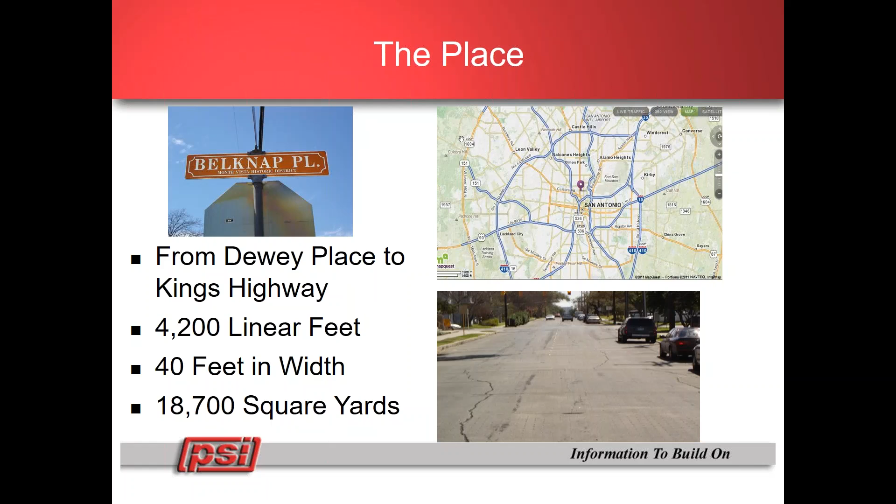Last year, in May, the homeowners of the historic Monte Vista district celebrated the dedication of Belknap Place as a Texas historic landmark. The place is from Dewey Place to Kings Highway in San Antonio, Texas. It's approximately 4,200 linear feet long, 40 feet wide, or approximately 18,700 square yards.

The person, Augustus Belknap, was born in 1841, Newburgh, New York, served as a captain of the New York Volunteers during the Civil War, moved to San Antonio in 1877, and was instrumental in the founding of the city streetcars, president of the Opera House, director of the San Antonio Fair Association, Second Ward Alderman, councilman at large, and founder of a local militia, the Belknap Rifles.

25 years after his passing, the City of San Antonio, the State of Texas, County of Bexar, on July 1st, 1914, awarded to Texas Granitoid Company the city's share of $14,900 through the sale of bonds on September 1st, 1913, to finance the construction and the paving of Belknap Place.

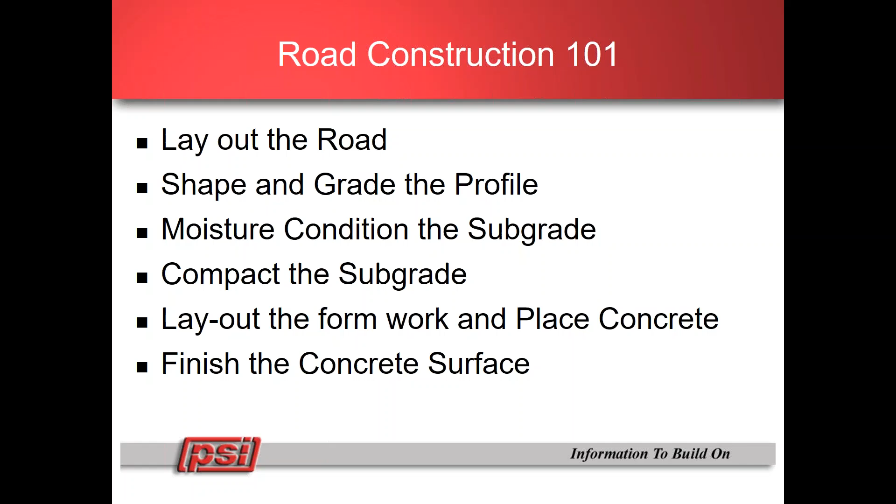I'm going to talk a little bit about Road Construction 101. As civil engineers, I'm sure we're all aware of the basic process: laying out the road, shaping, grading the profile of the subgrade, moisture conditioning the subgrade, compacting the subgrade, laying out the forms, placing the concrete, and finishing the concrete surface. Back in 1914, surveying was performed with optical transits. Perhaps distances might have been measured by the chaining method.

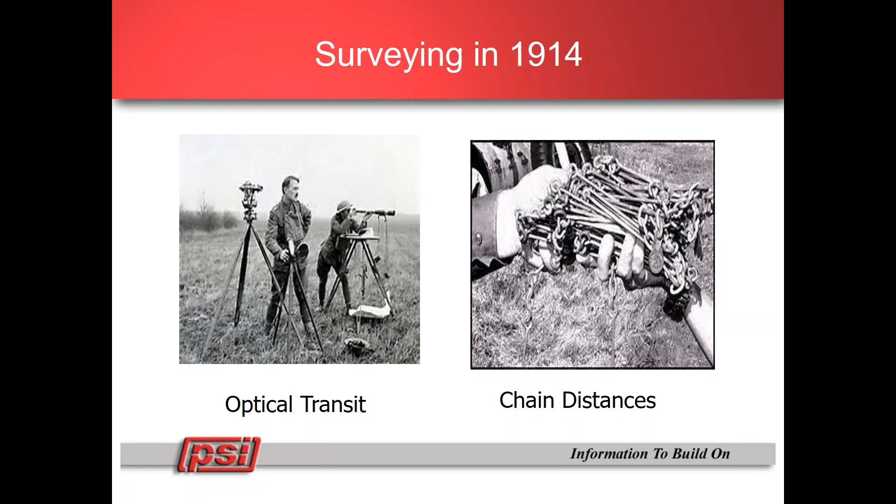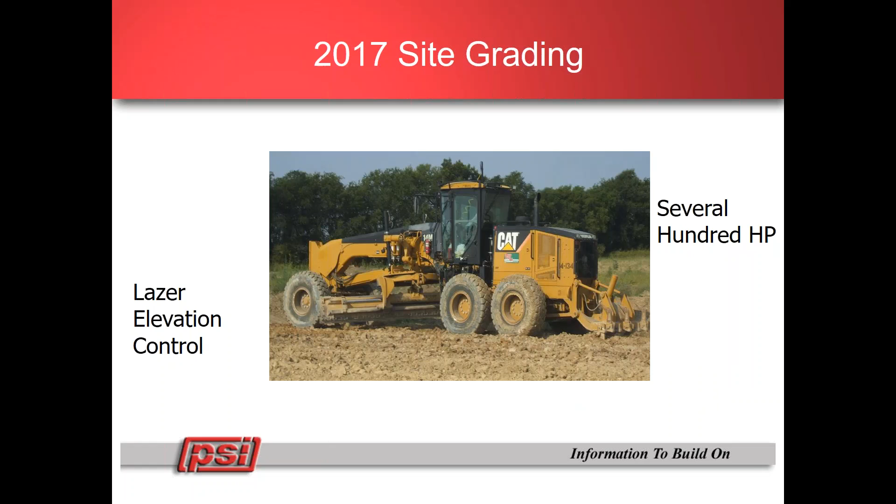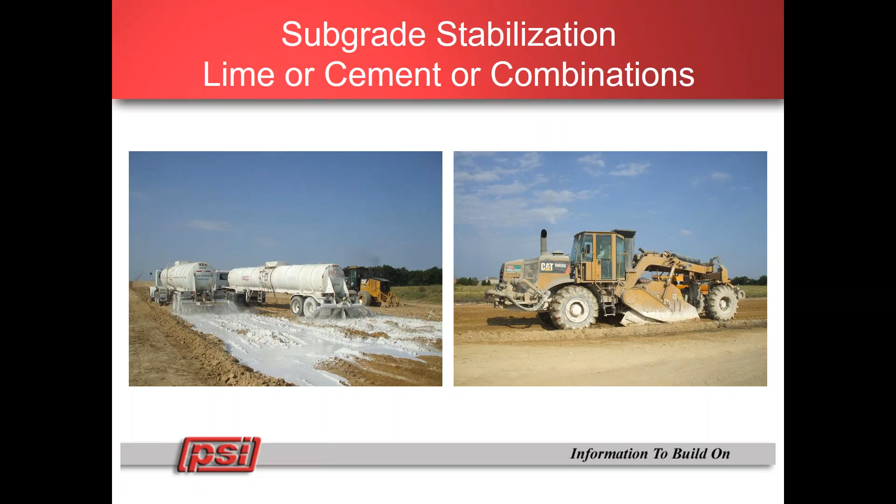We have subgrade stabilization with lime, cement, perhaps lime-cement-fly ash combinations, or other chemical admixtures to help in the stabilization of the subgrade. Back then, none of that was available. Today we have modern equipment for the pulverization and moisture conditioning of the subgrade for improved longevity and durability. None of that was available in the 1914 era.

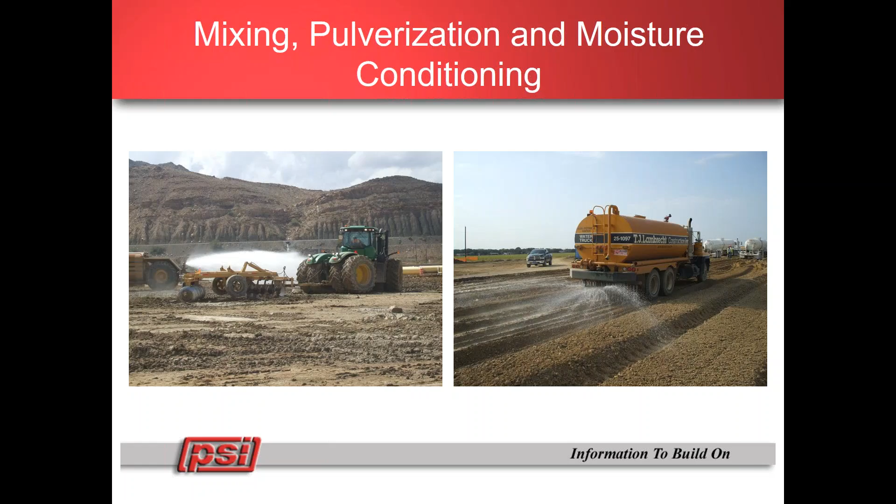Compaction in the 1914 era was probably a static roller pulled by a mule or horse. Today we have dynamic equipment with varying frequencies, amplitudes, or static for compaction, and compaction control through quality measurements by independent testing laboratories.

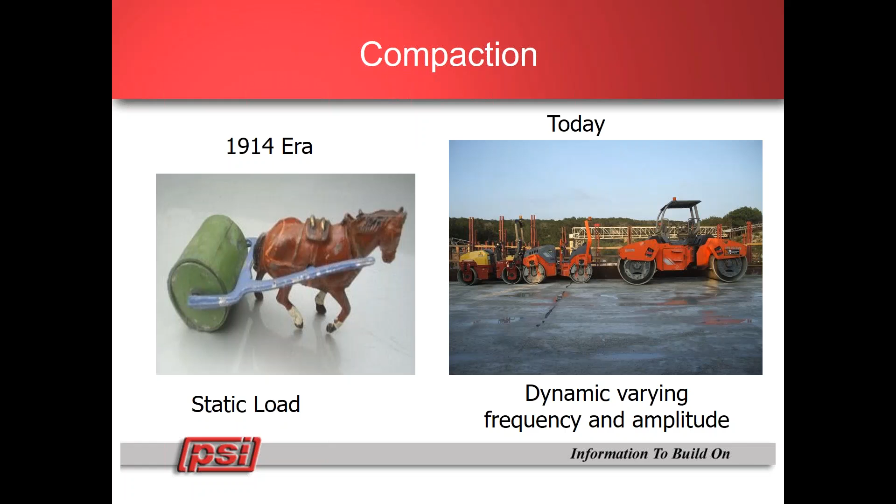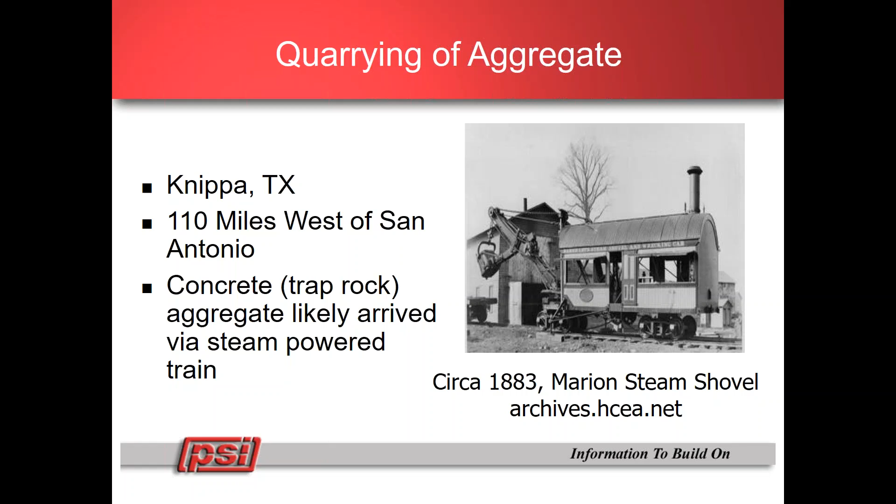The quarrying of aggregate for the concrete for this particular road was identified as originating from Knippa, Texas, which is 110 miles west of San Antonio. The process called for a trap rock material in the top surface of the pavement, and this material was likely quarried with a steam-driven shovel and brought into San Antonio by rail.

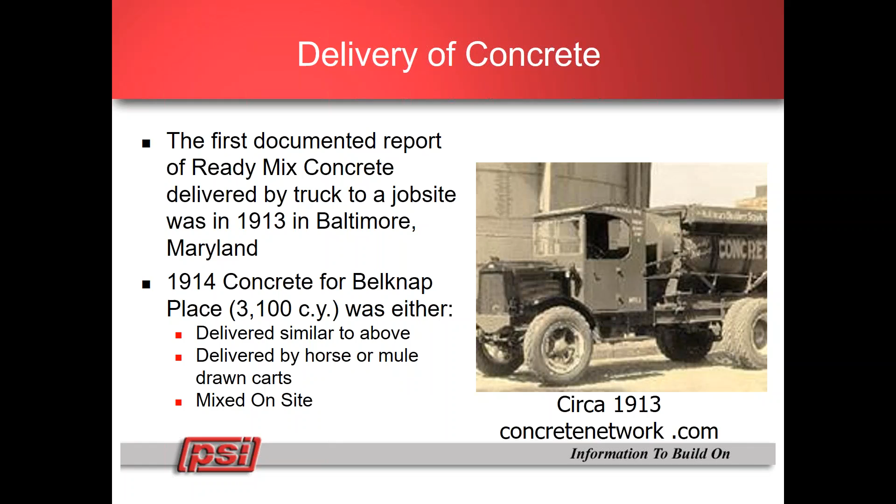The delivery of concrete in 1914 was either a crude dump truck, as we see in this picture. The first known delivery of ready-mix concrete to a job site was in 1913 in Baltimore, Maryland, and our street, Belknap Place, was placed in 1914. The estimated 3,100 yards for our project was either delivered similarly to this dump truck, or might have been pulled to the job site by horse or mule cart, or it might have been mixed on site.

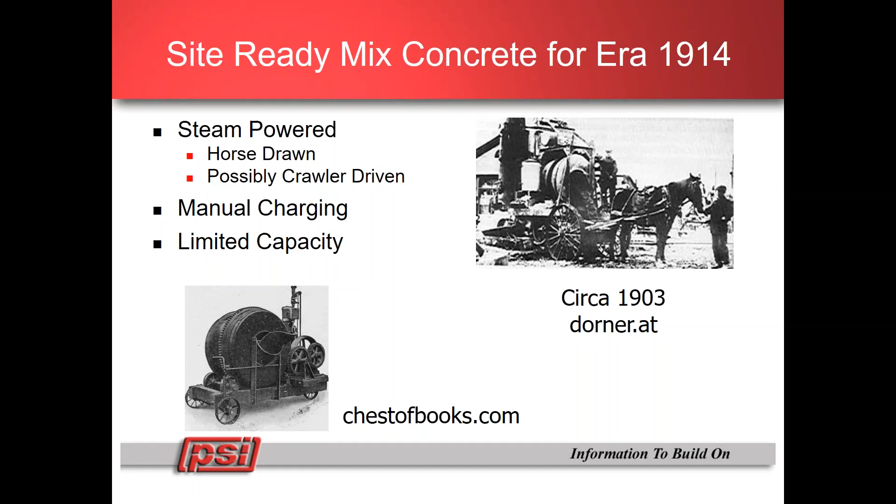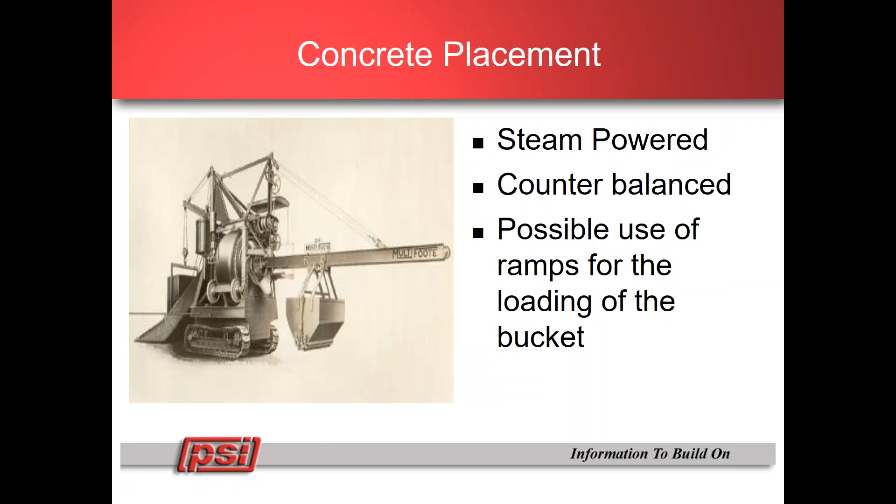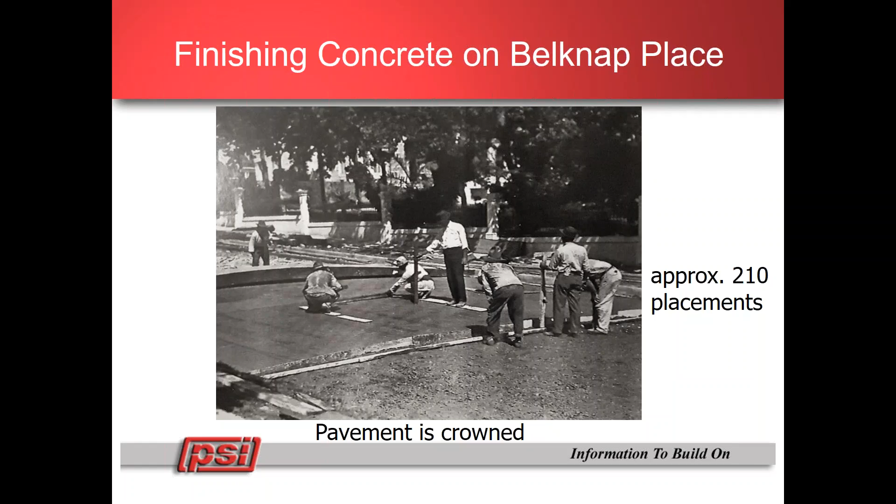Based upon the approximate number of joints that were counted on the road, Belknap Place was placed in approximately 210 independent concrete placements. Concrete ready-mix today can be computer batched. There are large silos for cementitious material. Back in 1914, cement was brought to the job site in canvas bags.

Today we have chemical admixtures for retarding and long-term curing benefits. There is large aggregate storage and belt feed for automated loading of the batch plant. Today it's very easy to achieve concrete production in excess of 200 cubic yards per hour, while that would have been unheard of in a day at the time of 1914.

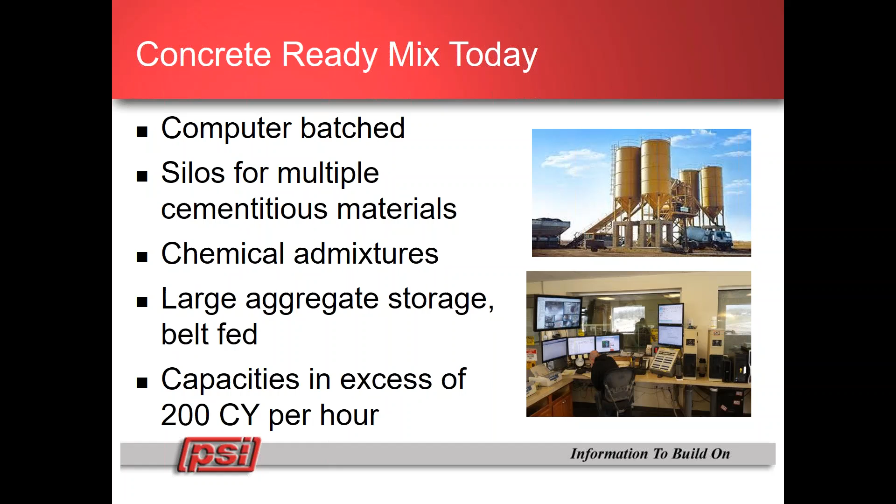Today, concrete can be delivered in 10 cubic yard ready-mix trucks. We have a mechanical finishing process. The daily placement of concrete can very readily achieve anywhere from 300 to 1,000 cubic yards today. So Belknap Place today could be placed in as few as 3 days, or perhaps 10 days on average, if we ignore intersections and other special considerations.

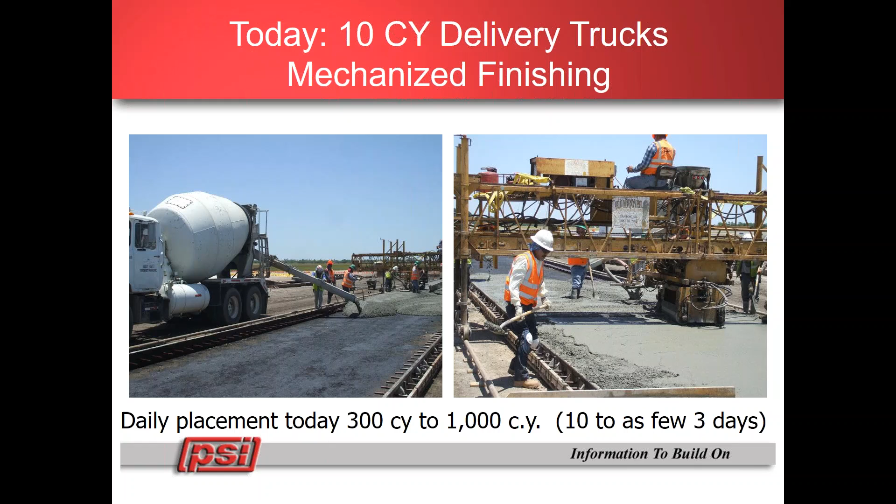There were no laser screeds at the time. We were able to obtain a few cores from the road. The cores that we obtained were approximately 5 3/4 inches to 7 3/4 inches thick, so they apparently exceeded the 4.5 to 6.5 inch thick requirement. The road is constructed on a fat clay subgrade having a CBR of 2 to 4, and there was no chemical modification or improvement to that fat clay.

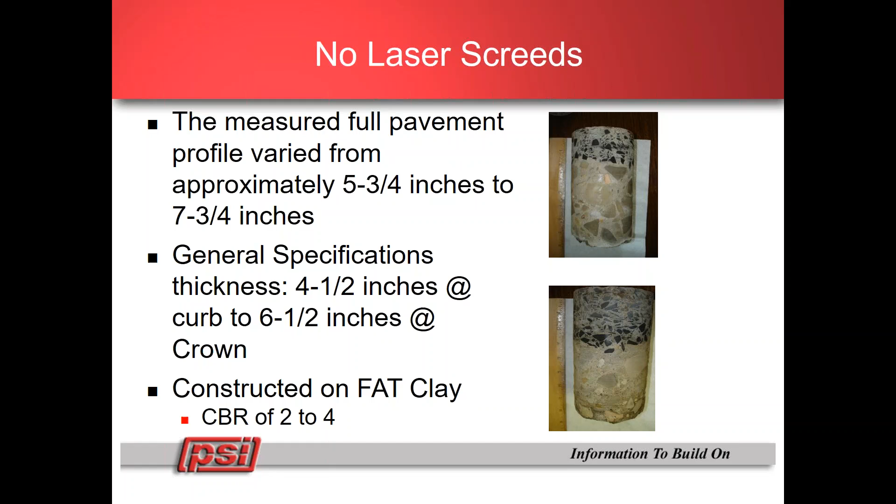The surface aggregate was a very hard, dense, black-colored stone, 3/8 inch to 1/2 inch, and it was visually identified as trap rock originating from Knippa, Texas, again, approximately 100 miles west of San Antonio. The fine aggregate in this material was the 1/4 inch trap rock screenings to dust, and there might have been some field sand that was used in that mix as well.

The apparent estimated concrete mix had a composition of 3-3-2, or 3 parts trap rock, 3 parts sand, and 2 parts cementitious material. The cement was about 25%, and the trap rock and sand was about 75%. And visually, it's hard to separate the trap rock and the sand because we don't know whether that material was batched all together or whether the sand was added separately, and with the trap rock, how much of that fines were just part of the rock process.

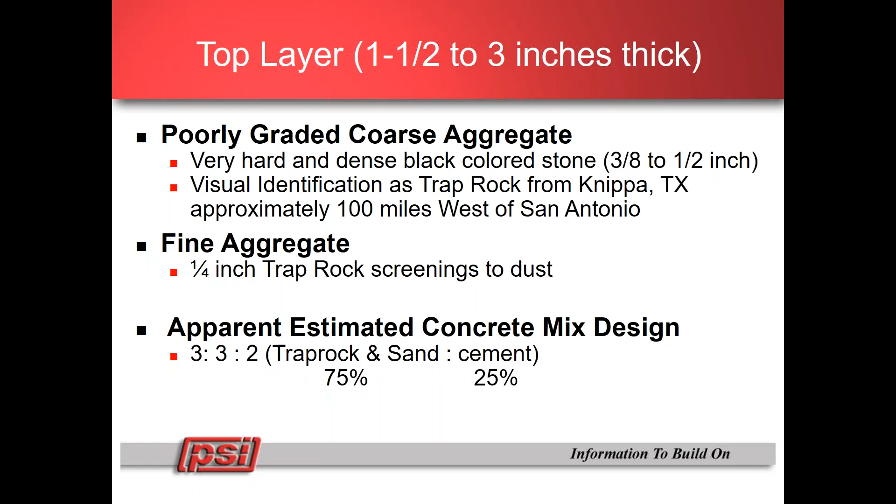The bottom layer was a gap-graded pit-run gravel local to the San Antonio area. The fine aggregate, a field sand, the apparent estimated concrete mix design of 3-2-1 is your basic concrete mix, 50% gravel, 35% sand, 15% cement.

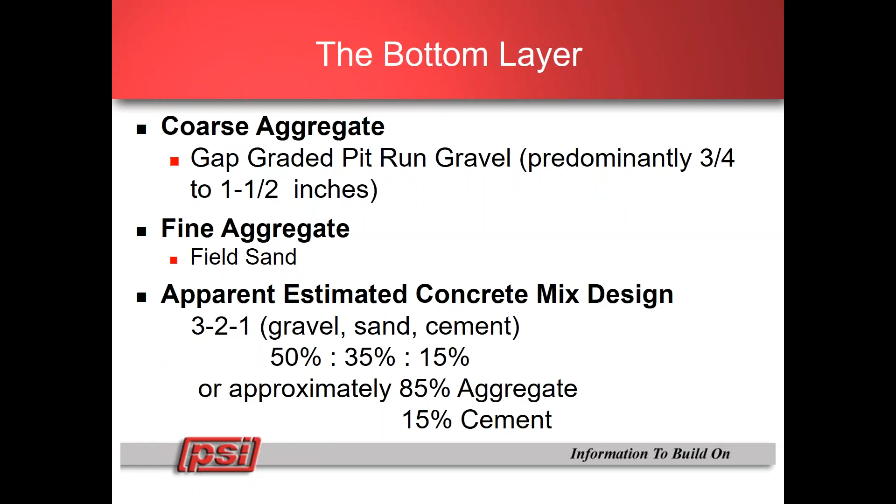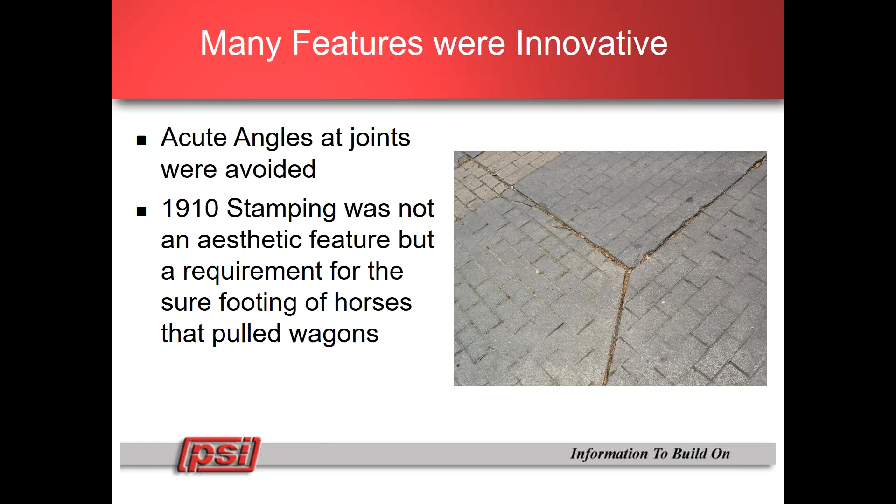While joint spacing was not fully understood, we see some transverse cracks in this particular picture. There were many things that they were innovative and ahead of their time. Acute angles at joints were avoided. This process included a stamped concrete feature. This feature was not added for aesthetic purposes, but was thought to be a requirement for the sure footing of horses that pulled wagons up and down the streets at this time, as automobiles were just coming into their beginning.

One of the interesting things is the first patent for stamped concrete was not granted till 1950 by Brad Bowman, and the Belknap Place preceded that by 40 years.

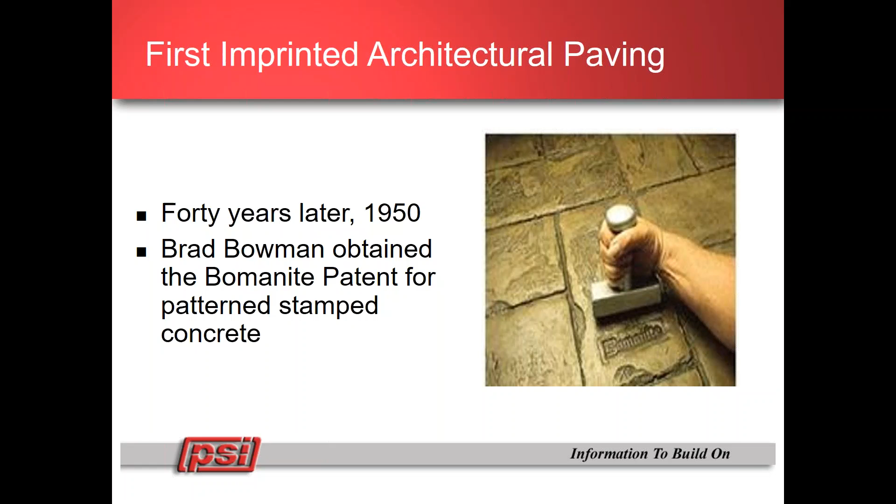Some of the achievements. There's what may have been, or what we would think today should have been, a cold joint. There were no curing compounds, no bonding agents, no set retarders, no water reducers, and this mix was placed in two separate horizontal lifts. We clearly see that these cores are upside down, but we clearly see that dense surface trap rock and the river gravel in the underlying portion.

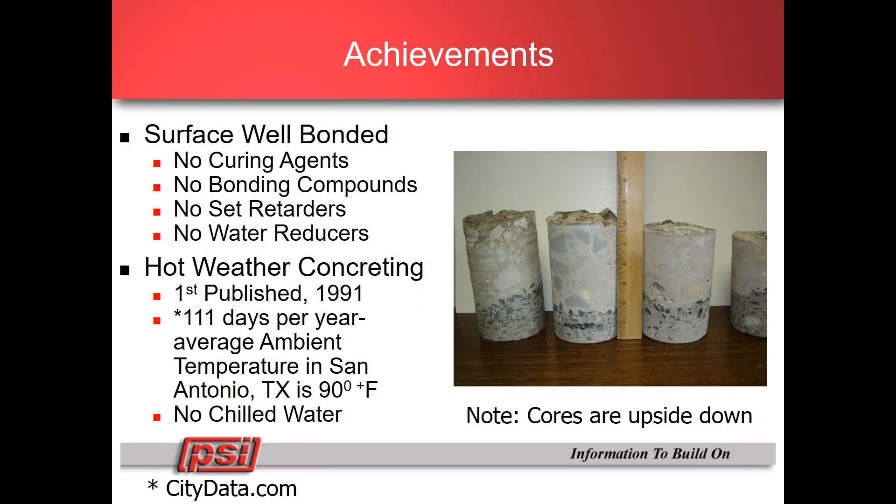From published literature by the San Antonio, approximately 111 days per year, the average temperature in San Antonio is above 90 degrees, and there was no chilled water at the time of this concrete production, and yet they were able to place it, finish it, and get a good bonded two-course concrete surface that has lasted for 100 years. This is truly an amazing accomplishment.

The performance of this road: today's city thoroughfare design to accommodate metropolitan bus service would require 4,500,000 18-kip ESALs over a 30-year design period, with a minimum of 9 inches of Portland cement concrete. Belknap Place has been in service for 100 years. It's surpassed the current 30-year traffic design with varying pavement thicknesses, clearly less than the 9 inches and in the range of 5 3/4 to 7 3/4.

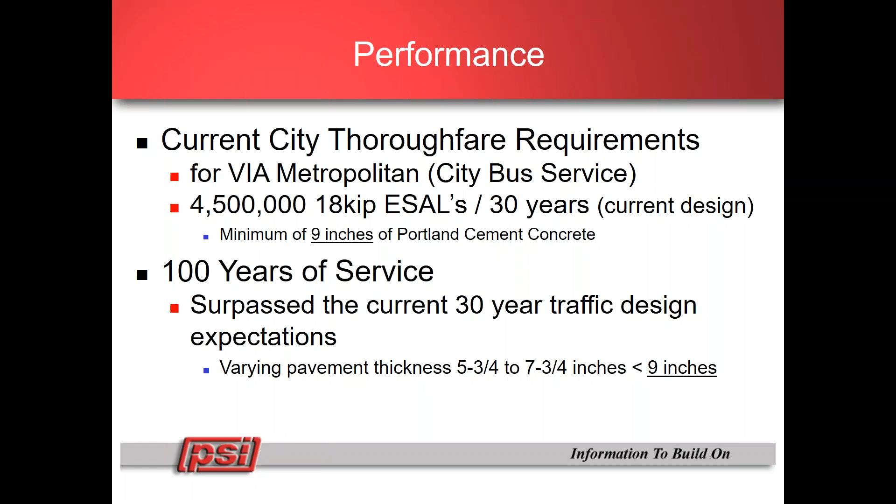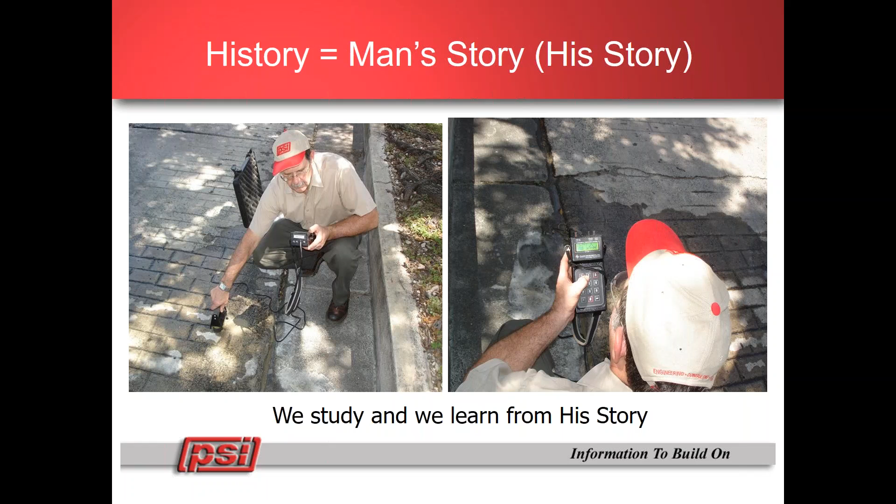With some insight, while recognizing the durability and the success of Belknap Place, PSI advocates that current procedures and available technologies for the design of concrete mixtures, and the design and construction of new pavements, should not be ignored. Moreover, the concept of this pavement and this process should be considered for incorporation into the available technologies for further enhancement of the durability of pavements that are constructed today.

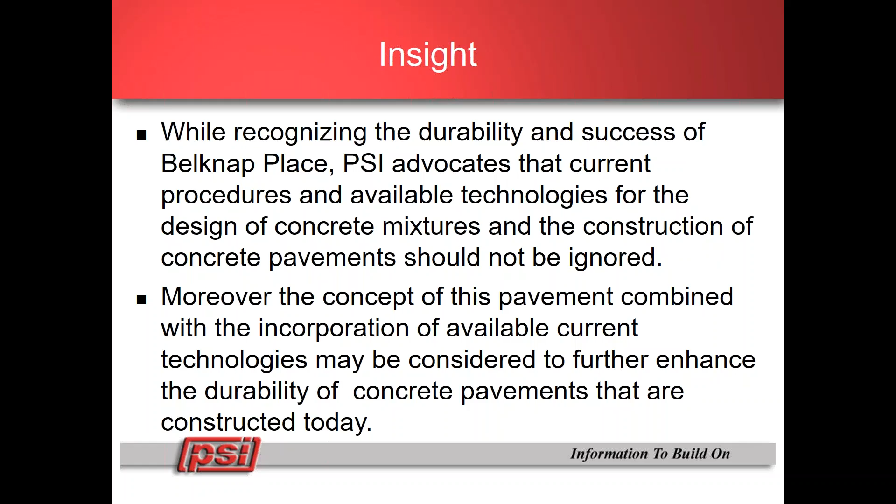With that, I'd like to turn the presentation over to Jan Prusinski. Jan? Yes, thank you very much, Bill, and I appreciate your involvement with this project, and definitely the leadership of Don Talbert, who even though he's been retired for several years, was instrumental in helping us obtain the historical marker.

My organization, the Cement Council of Texas, actually worked with the Monte Vista Historic District, and then we had to go through multiple layers of government, City of San Antonio, Bexar County, up through the Texas Historical Commission to get that historical marker. It's just not a given. It actually has to be very well documented, and we were able to do that.

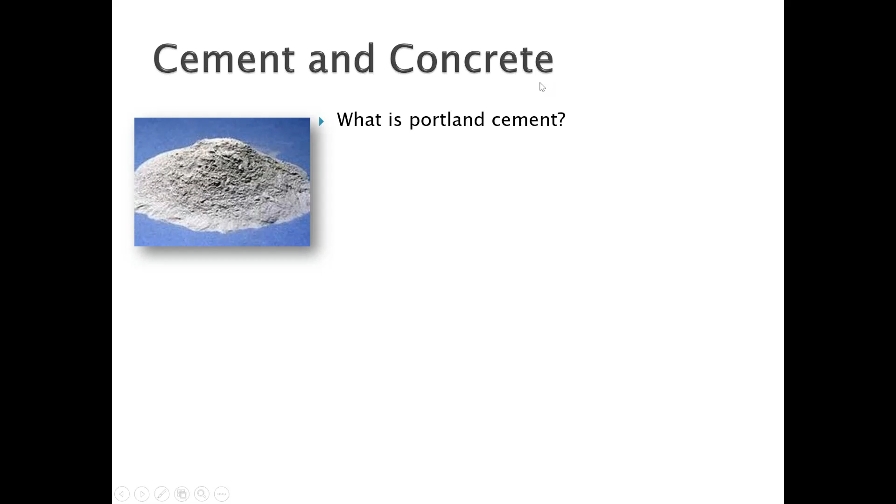Now, cement and concrete, I'm not going to dwell on this. I think most of you know about this stuff, but Portland cement itself is, of course, made from limestone and other earthen materials. It's mined or quarried, and then it's heated to a very high temperature in a kiln. It comes out as a rock-like material called clinker, and then it's pulverized into a fine material. It chemically reacts and hardens when it's mixed with water. That's why we call it hydraulic cement.

And the word Portland actually comes about because the inventor or the original patent holder of Portland cement, Joseph Aspdin, thought it looked like the limestone cliffs in Portland, England. So it has nothing to do with Portland, Maine or Portland, Oregon. It just was what it looked like to him. And another historical item that I don't have on the slide, 2024 is actually the 200th year of the celebration of the patenting of Portland cement. It was patented in 1824.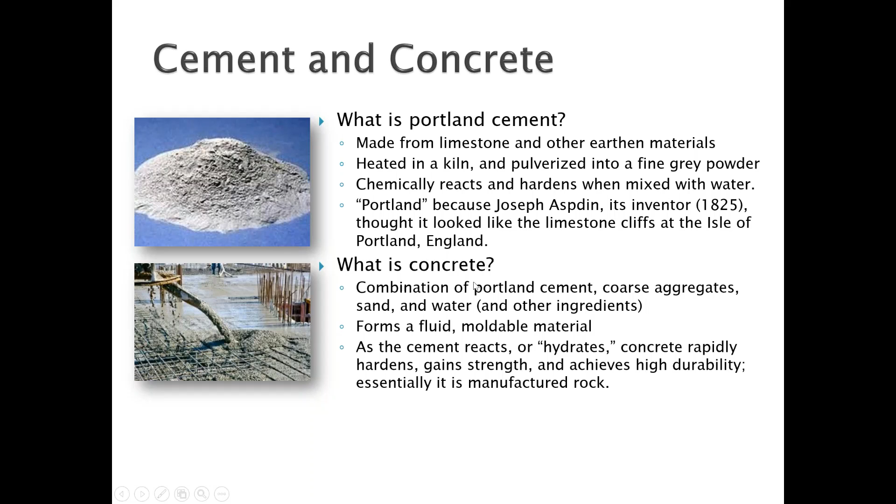Now, concrete, of course, uses Portland cement, and it's a combination of Portland cement, coarse and fine aggregate, sand and water, and now, as Bill mentioned, other cementitious materials and different types of admixtures. The beauty about concrete is that it forms a fluid, moldable material, and then as it hydrates, it turns hard and gives you high amounts of durability if done right. And certainly Belknap Place is an example of concrete being done right.

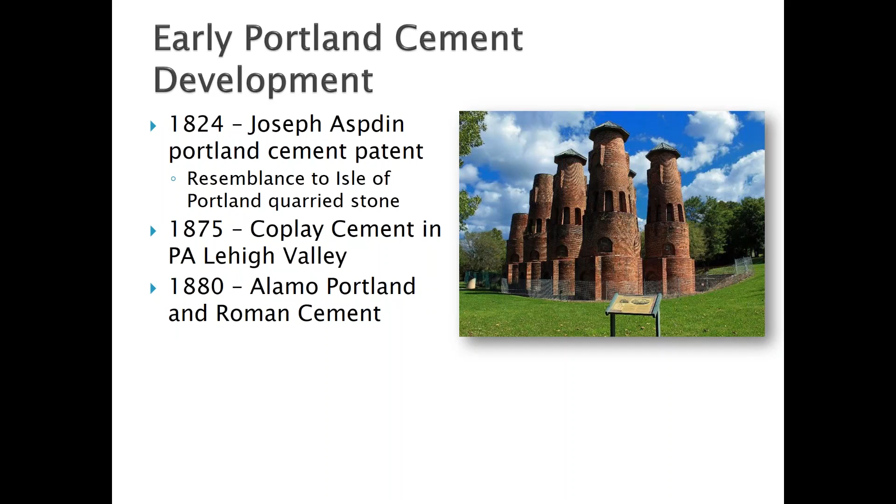Now let's talk specifically about the San Antonio cement industry. If you look back, the cement industry is large in San Antonio, and it's an essential part of the community fabric. And we'll bring that theme as we go on with this presentation. But San Antonio is essentially the cradle of the cement industry west of the Mississippi. So we're the first Western cement plant in the United States, and still one of the very first cement plants built in the United States, the Alamo plant.

Now, I mentioned the Alamo Portland and Roman Cement Company. It was incorporated in 1880, and it was the second U.S. cement plant after the one near Allentown. It was incorporated by a gentleman by the name of Loyd and another by the name of Kalteyer, and a few partners, but one of them was actually a drugstore chemist, and he helped formulate the original formulations for the Portland cement that was going to be developed at the Alamo plant. The other interesting thing is that for the first number of years of the existence of the Alamo Portland and Roman Cement Company, their office was above that particular drugstore, so that's where they resided.

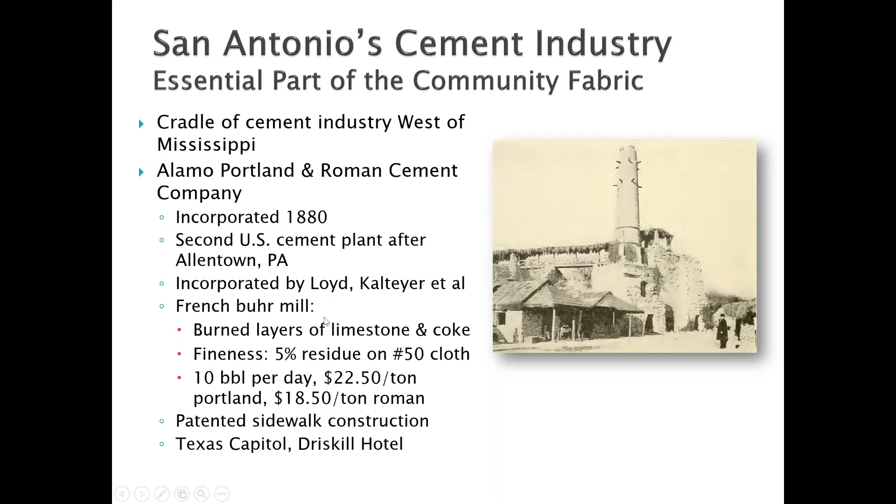And eventually, this product from this specific Alamo plant was used in the Texas Capitol and the Driskill Hotel, among other historic structures in Texas. Now, in San Antonio's cement industry, one of the original presidents was originally the accountant when they incorporated in 1880, and he eventually became the president, Charles Baumberger.

And you can see that he actually built a house in the Monte Vista district that still exists today, and it's a beautiful house. As part of that Belknap celebration that Bill talked about, the current owners of the house were gracious enough to allow us to have a cocktail party there the night before, and it's a wonderful place. It's in Monte Vista, and it's a concrete house, by the way.

In 1908, that 1880 plant had outlived its quarry lease from the city, and the quarry was pretty much mined out. Plus, the plant was quite inefficient for the demand that they now had. They needed 1,500 barrels per day, and so they built a new plant in 1908. Now, this plant was built in an area of town just a little bit north of where the streets were and the horse-drawn streetcars went to, and it was called Cementville. It wasn't incorporated, it was just termed that because it was north of town, a little ways up.

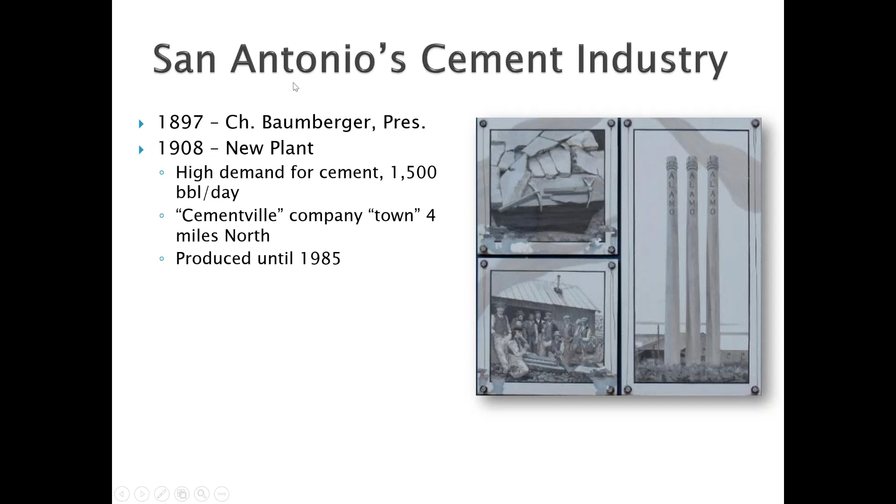Most of the workers actually lived on the site, so they had corporate housing, a corporate store, they built a swimming pool, they had a company band. It's interesting, if you go to Alamo's plant, which is now on 1604, the company still exists, they have a whole hallway filled with pictures of the company band and the company facilities in Cementville. And that produced until about 1985. Now Charles Baumberger Jr., the son of the original Charles Baumberger, was the president until 1968. So it was a family affair, more or less.

And then within San Antonio, the Capitol Cement plant was built. Now, this is a different company, and most of you have probably heard of H.B. Zachry. They built Capitol Cement because there's a great seam of limestone that runs through the area. And now it's termed Capitol Aggregates, still owned by Zachry, ultimately. But that was the second cement company that came to town. So now there were two cement plants: the Cementville plant and the Capitol Cement plant, which is located near 410 now in San Antonio.

And then eventually, in the early 80s, the Cementville plant ceased production, and then the Alamo plant, after the widow of Charles Baumberger Jr. died, they had no children, so the estate was sold to an Italian firm called Buzzi. It was their very first U.S. asset, but they understood the historical context of this plant, so they continue now to call it Alamo Cement, even though they have many plants in the United States now, all going under the Buzzi name, but this one in particular retains the name Alamo.

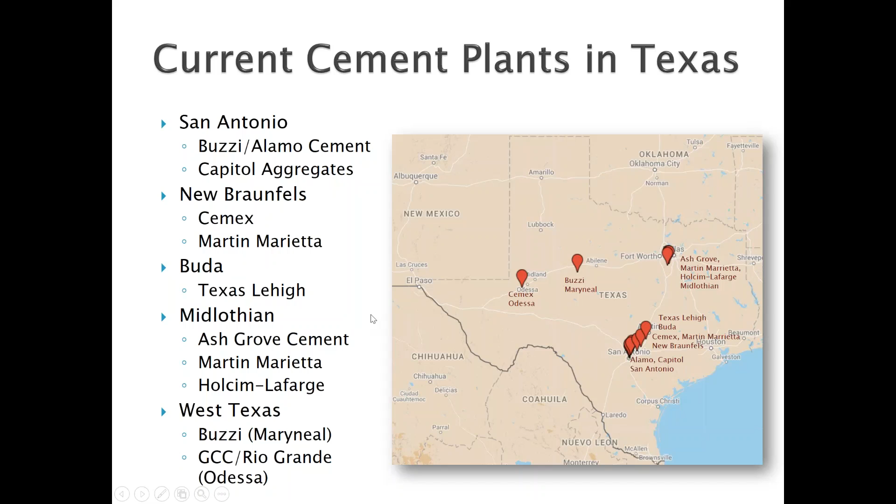This one, Cemex, I have it labeled on the map, Cemex in Odessa. That actually just changed hands in December. Now it's GCC Rio Grande in Odessa, Texas. But we do have a lot of cement plants and capacity within Texas. So if you ask, well, how much do you have in Texas? These are very recent numbers.

In 2016, we had about 16.4 million tons of cement used in Texas, and if you compare it to California, which is the next highest state, they had about 10 million tons. We're more than 50% more cement use in Texas. And on a national level, Texas is over 15% of the total national consumption of cement.

And we also track state-let jobs. Texas, by far, produces more concrete pavements. Now, these are state DOT pavements. They don't include local pavements. But about 20% of the concrete pavements let by DOTs are Texas pavements. Next state is Iowa. Even though they're a smaller population state, they build a whole lot of concrete pavements. Most of their county roads are concrete pavements. And we have things that we can learn from Iowa.

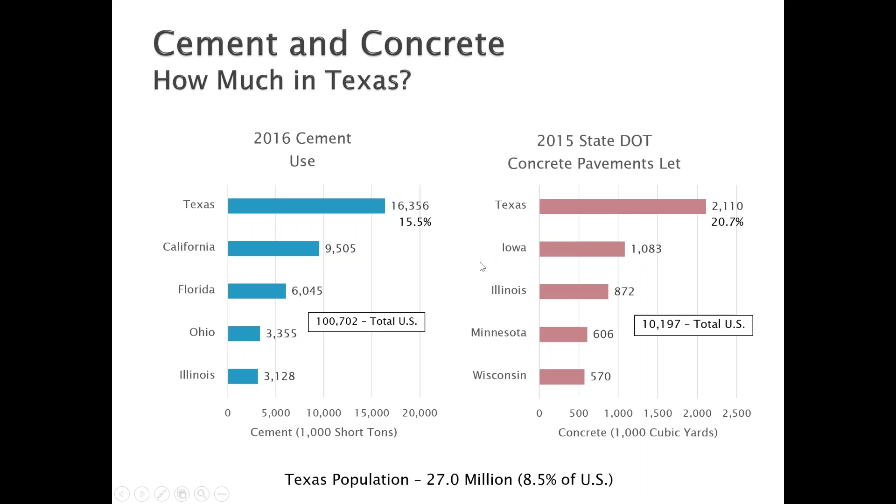So, if you compare these numbers, the population of Texas, maybe about 27 million, is about 8.5% of the United States. So we're using well more than our population share of cement and concrete. Now, back to the history. Automobiles were just getting underway during this whole historical context. I believe 1908 was when the Model T was introduced.

And of course, dirt roads were a problem for automobiles. Horses could kind of track themselves somewhat out of the dirt, sometimes out of the mud, but cars got easily bogged down. And plus, in the urban areas during dry periods, for instance in San Antonio with a lot of hot, dry weather, these cars would kick up dust, and you'd have urban dusting problems.

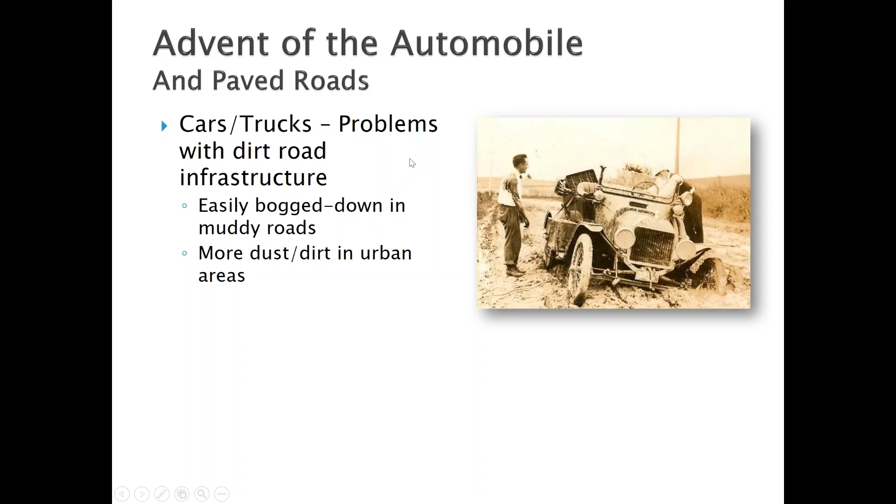But I kind of feel like, if you've ever seen the Greek wedding movie, I can't remember the exact title, but the father in there always said everything was invented in Greece. Well, I feel like that with the cement industry and George Bartholomew, everything is invented in Texas.

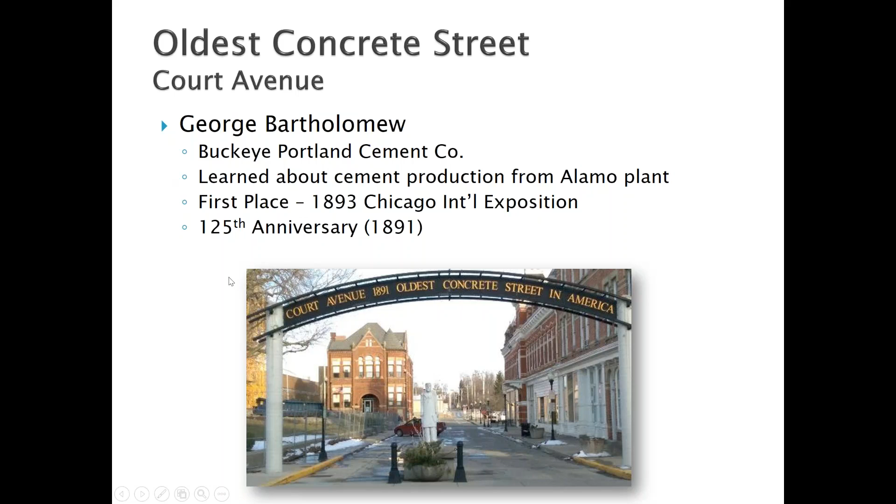He was in Ohio, but he learned about Portland cement production because he spent a lot of time at the Alamo Plant learning about it, and then he brought that technology up. So we have a small claim on that very first concrete road. We helped teach them about cement there. The road technology actually won first place in the 1893 Chicago International Exposition. So this was an innovative technology that was a precursor to a lot of good concrete roads and even our interstate system. And it recently celebrated its 125th anniversary.

Now in Texas, here's a timeline of what's been happening here. 1898, you had your first paved road in Texas. That was Market Street at St. Mary's, in San Antonio. Very first paved street, not concrete, of course. That was more of a bituminous type road. First automobiles, both in Texas and San Antonio, 1899.

And then in 1904, San Antonio began issuing its first road bonds, with additional bonds in '07, '13, and '15. So very likely the public portion of this was funded with some of this road bond money. And then you have Belknap Place, constructed in 1914. And then 1917, again, a lot of 100-year anniversaries. TxDOT is celebrating its 100-year anniversary this year.

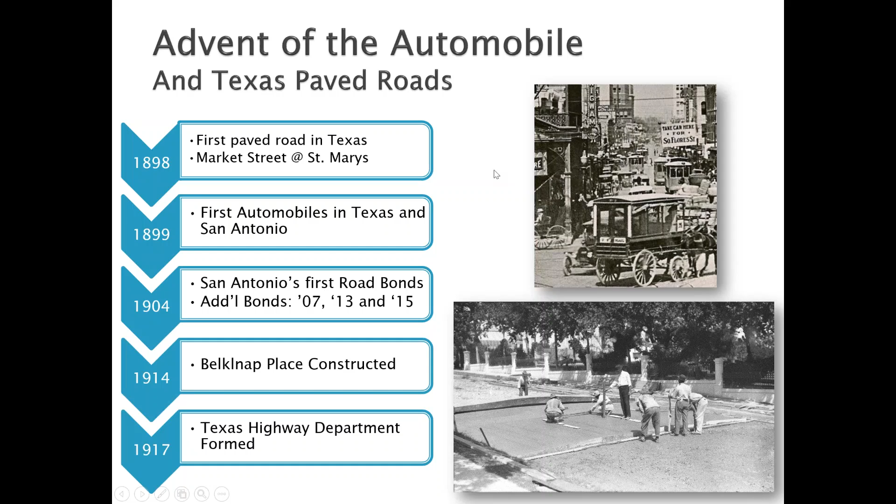So it's interesting. I was able to find a really interesting publication from the Agriculture and Mechanical College of Texas, and we all know about them now. But it was called Principles of Pavement Selection, and in this, they really went into a lot of great detail, and it's almost like

This is Jan Prusinski. I'm hoping that you can hear me again now. I completely lost the signal for a second. Yes, so I'm going to. Okay. Thank you. I'm so sorry about that. I didn't push the wrong button. It just actually lost the signal. So I'm going to continue here.

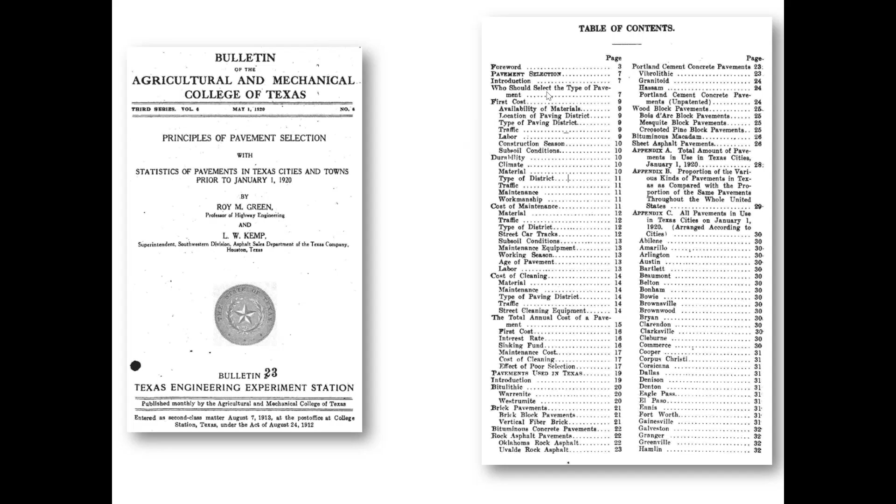So with this table of contents, if you look closely at it, you can see that it talks about different types of Portland cement concrete pavement, and there were several patented methods. So this was a technology with a lot of innovation happening. There was something called the vibrolithic method. There was granitoid, Hassam, and unpatented Portland cement concrete.

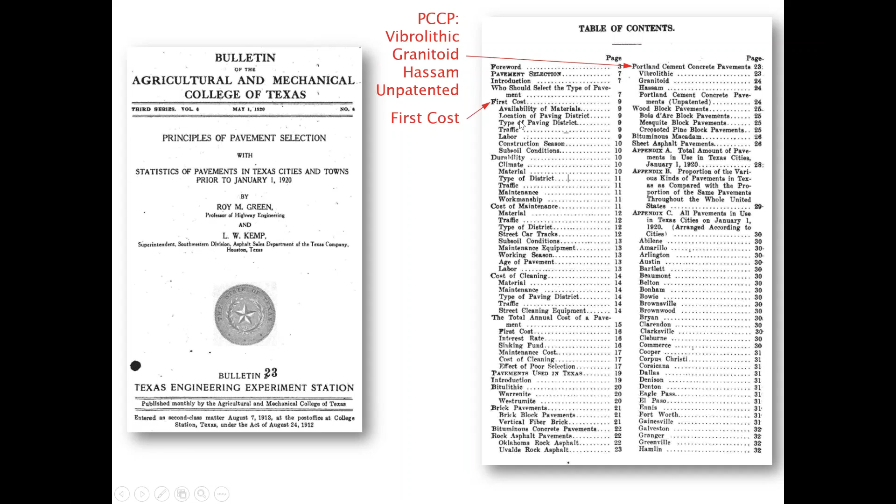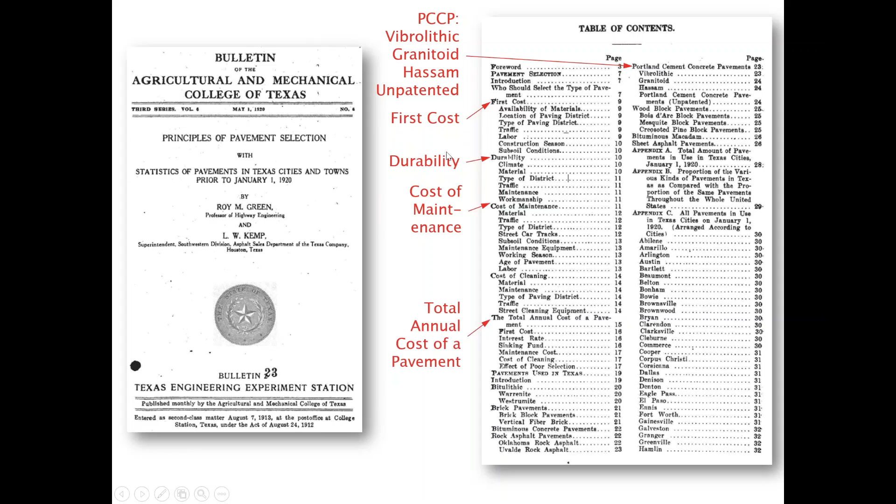He talked about the first cost, and then they talked about durability of roads and the cost of maintenance. So they were already talking about life cycle cost of pavements. And then where you have a total annual cost of a pavement, kind of a life cycle thing. And then they actually document all paved roads in Texas in 1920. So this is a great historical document. And from this document, I was able to produce

Another 100-year anniversary last year was the Portland Cement Association, and I'll just mention that association was instrumental in bringing things together like ASTM C1, the Cement Standards Committee. The American Concrete Institute was formed with a lot of PCA support, and they drove concrete technology through the century with things like water-cement ratio, a sand library, development of air entrainment, and now, for instance, MIT's Concrete Sustainability Hub.

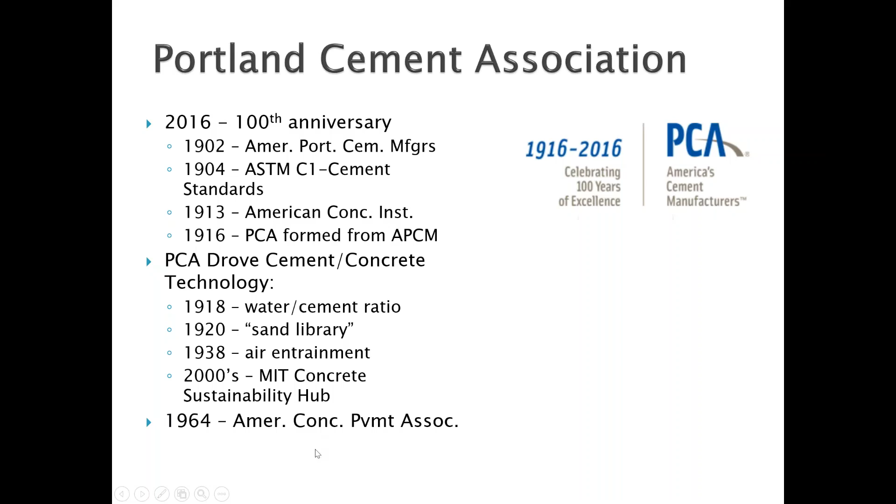So Portland Cement Association has really driven a lot of concrete technology, and American Concrete Pavement Association helps drive some of the concrete pavement technology these days.

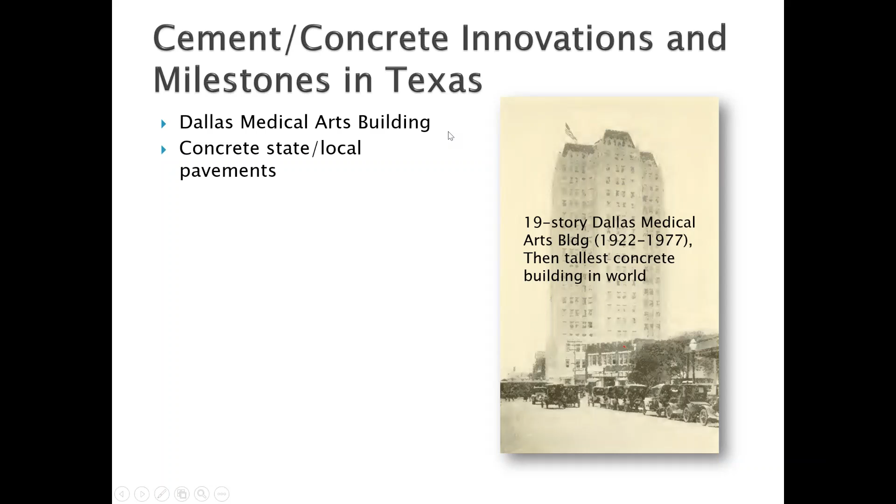Some other concrete milestones in Texas over the century: you had the Dallas Medical Arts Building built a little bit after Belknap Place, and at the time it was a 19-story reinforced concrete building, the tallest concrete building in the world at that time. You had a lot of state and local pavements being built like Belknap Place, but also in other areas. The first concrete road in Texas was actually not Belknap, but in Palestine, and it was itself a granitoid road.

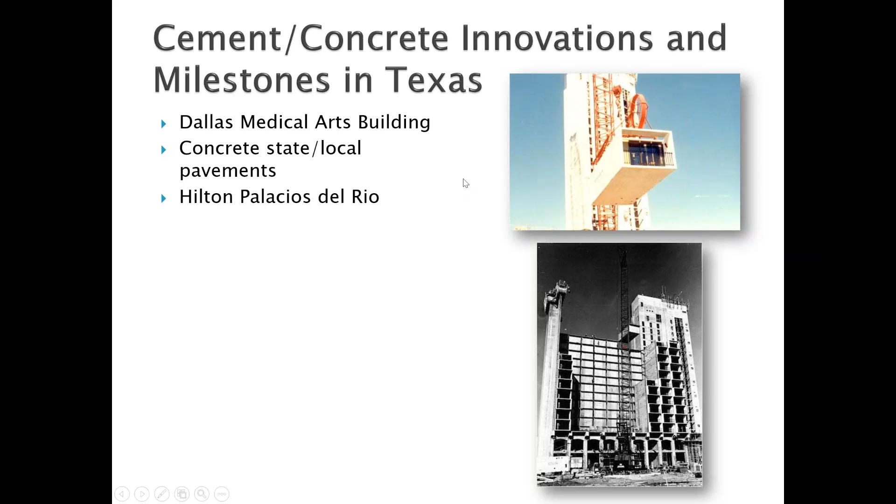Many of you may be familiar with the Hilton Hotel on the river there, where they used precast elements to put the rooms in place during HemisFair, the World's Fair in San Antonio. And roller compacted concrete pavement got its start in Texas at Fort Hood in the United States. That was the first RCC pavement.

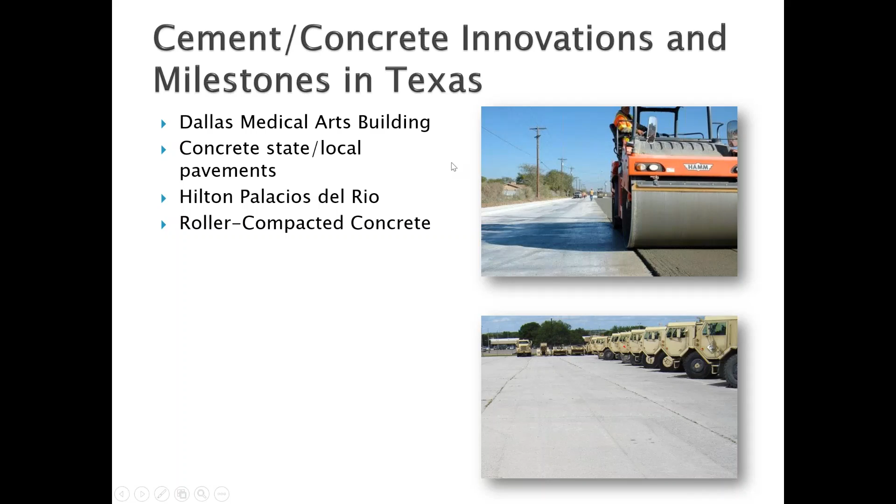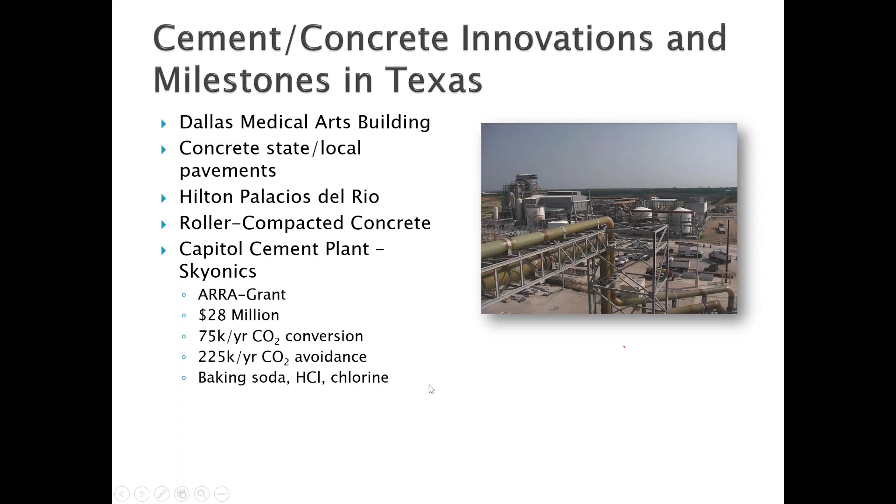Even now, like at the Capitol Cement Plant, they actually have something called SkyMine, which is consuming some of the carbon dioxide that is produced, about 75,000 tons per year of CO2, and it's also avoiding another 225,000 tons by making industrial chemicals such as baking soda, hydrochloric acid, and chlorine.

The cement industry in San Antonio and in Texas, but particularly San Antonio, has integrated itself so well that its old facilities have been essentially returned to the community as viable and a lot of times very beautiful public spaces. We're talking about things like the Japanese Tea Garden, the Alamo Quarry Market, the Beckman Quarry and La Cantera Development, the Baumberger Endowment.

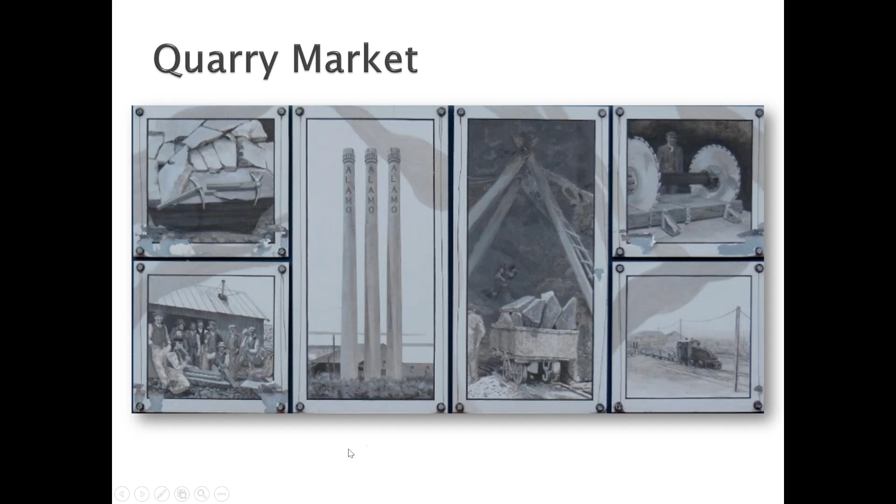And of course, we've got the Alamo Quarry Market. If you go up Highway 281 through the middle of San Antonio, a few miles north of downtown, you'll see these stacks. These were the original stacks of the Alamo Cementville plant, and now you have a very successful high-end mixed-use development there that incorporates these same stacks. So again, amazing redevelopment of these industrial sites.

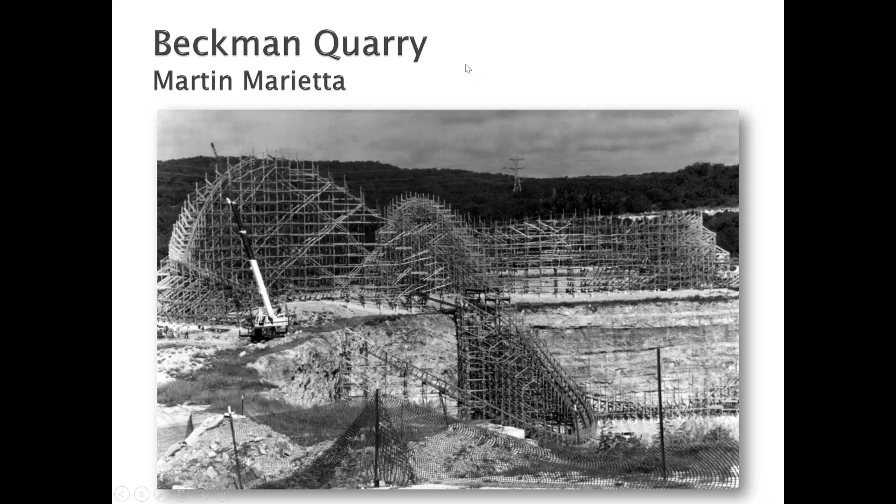Now the Beckman Quarry is not associated with cement in particular, but a lot of the aggregates were used for concrete, certainly some for buildings, some for asphalt. But the Beckman Quarry, owned by Martin Marietta, guess what's there now? Fiesta Texas and the La Cantera Development. So that's been developed and turned into very valuable public spaces.

One of the things that's probably not well known about the whole Alamo story is something called the Baumberger Endowment. I mentioned to you that the Baumbergers, Charles Jr. and his wife, had no children, but they really loved the community and they loved children, and what they did was all their millions of dollars from the sale of the cement plants and whatever their accounts were at the time were given to the Baumberger Endowment. All this money is used for college scholarships for students that reside in Bexar County, Texas, which of course is the San Antonio area.

And they place particular attention on students who otherwise would have difficulty affording college. It's not merit-based per se. Students that have A, B, or sometimes even C averages can apply and very well may be funded by this Baumberger Endowment. And you get $5,000 annually for 4 years, which can be a significant help to your tuition and living and board expenses.

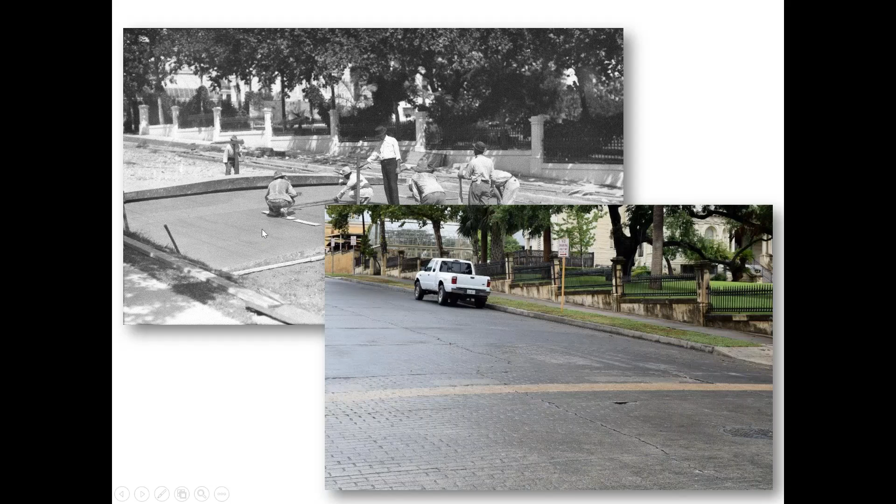Another picture, you saw the construction photo we showed you. Behind it is the Koehler House, the owner of the Pearl Brewery, and you can see that fence there. Well, that's the same view today. So you're looking at what they constructed there, and there's the fence, and there's the road. So amazing that you can kind of go and compare.

That's the end of my presentation. I certainly invite you to view the historic marker.